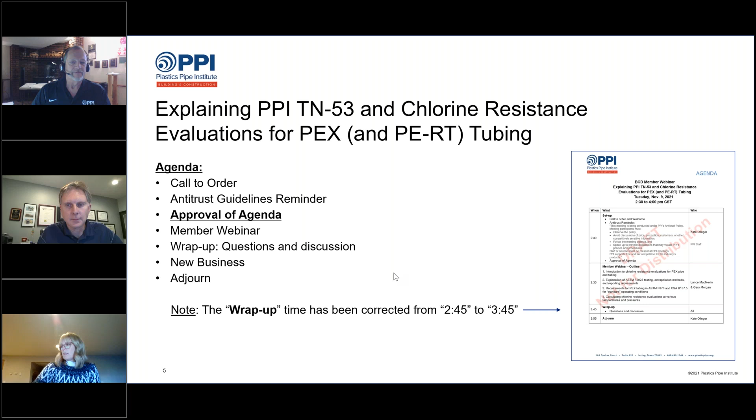So here's the outline of the presentation. We're going to start with a little section, kind of a preamble, a prologue, which is about PPI TN53 and the importance of thorough awareness of this topic. That's just a few slides to explain why we're doing this, why this webinar was felt to be important.

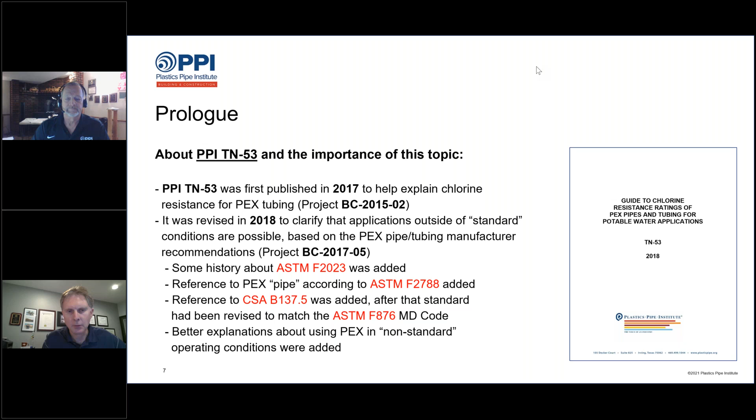So ASTM F876 is the standard for PEX tubing. If somebody within PPI is talking about pipe, we're talking about iron pipe size pipe, or DN sized metric pipe. So polypropylene could either be IPS sized or a DN sized metric sized pipe, like 160 millimeter OD. So that's why we use the terms tubing and pipe - they're not generally being used interchangeably in this presentation today.

Yeah, but the individual product standard does outline that in great detail though. But yeah, thanks for that, Lance.

Essentially, the document consists of 8 sections as outlined here. We'll actually touch on each of these 8 sections. The first being the scope, the second being the background and introduction to F 2023, and also the document does touch on ANSI, NSF, CSA Standard 61 as well. We won't really touch on that today, but the TN53 document does make mention of it for drinking water approvals.

The next section, 3, is centered on test conditions of the testing methodology, talking about different times and temperatures, with a primary focus on 140 or 60 degrees C. Number 4 is evaluation of the results of the testing, and the 5th section is the significance of the chlorine resistance ratings on the application, especially for operation outside of those ratings. Section 6 talks about the effects of excessive operating conditions for hot water piping applications, and finally section 7 covers resources for domestic potable water system design, which we won't get into today. There's also a short summary statement at the end of the document.

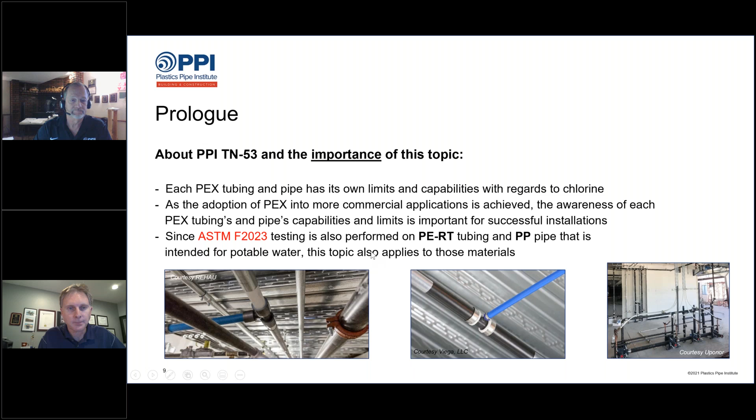Yeah, those are all commercial installations. So what's different about commercial versus residential is that in commercial there is the chance, the possibility, that we could be having higher temperatures and higher pressures than what we normally see in a residential application.

The focus of this presentation today is aimed at what we've referred to as free chlorine, and we're not going to touch so much on chloramines or chlorine dioxide today. As Lance and I talked earlier, and many of us on this call know, there's a current BCD project, BC 2020-01, investigating the effects of chlorine dioxide on BCD member piping materials. That is an active project, and Kate Olinger is heading up that project.

Also, we want to point out that there is a PPI statement A that discusses specifically chloramines in comparison with free chlorine when that's used in potable water. It's also a good document, one that should be used freely throughout your organizations. A lot of work went into that in testing at the time it was developed.

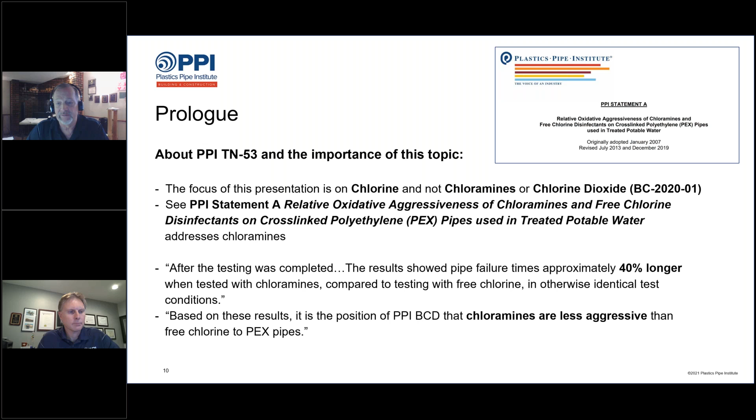Going on to that, the testing we did actually shows that chloramines testing was typically less aggressive towards the PEX pipe than free chlorine was, certainly no more aggressive. So you'll often hear us say free chlorine, but we feel that chloramines certainly don't offer any more of a challenge to the PEX tubing than free chlorine does. So as it says here, we felt chloramines are less aggressive than free chlorine to PEX pipe. Please refer to statement A if you have any questions on chloramines specifically.

Okay, now we get to the good, the bad, and the ugly. There's a reason why things are developed, and a reason that this topic received so much scrutiny in the late 90s. Many of us know this history, but there was a piping product widely used in North America starting back in the 80s, mid-80s actually, called polybutylene.

It received widespread use in residential plumbing applications for several, actually many years, until it was realized that failures were occurring as a result of oxidation induced by chlorine used in potable water distribution. It wasn't just the polybutylene tubing that had issues, it was also the polyacetal fittings widely used and molded with the polybutylene tubing that had quite a challenge with free chlorine.

As a result of that, and the result of many failures, there was a class action lawsuit. The links at the top bring you to these various settlements, but all in all, this was a major hit for the resin companies involved, and pipe manufacturers as well. Settlements totaled nearly $1 billion.

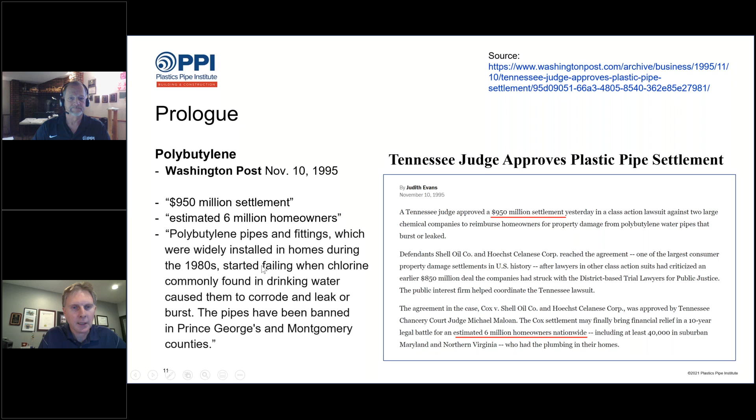That actually made it very hard for PEX to make inroads into North America, because of the bad reputation they got assigned to plastic pipes as a result of the polybutylene failures. So, of course, nobody would ever want anything like that to happen again. That's why we're much more responsible today with all the testing we do.

Yeah, and as a result, along the way - I think the original publication, before 2017, was reaffirmed in '17. Yeah, this was first published in 2004, I think. This document, TN31, was written primarily to talk about the differences between, for instance, PEX and polybutylene.

As I mentioned on the previous slide, the POM material, the polyacetal fitting, had significant challenges working with hot chlorinated water. At that time, the understanding of the mechanism of free chlorine and how it would attack polymers was not very well understood, and certainly there was no methodology in the world that actually looked at the effects free chlorine in distributed potable water has on various plastic materials.

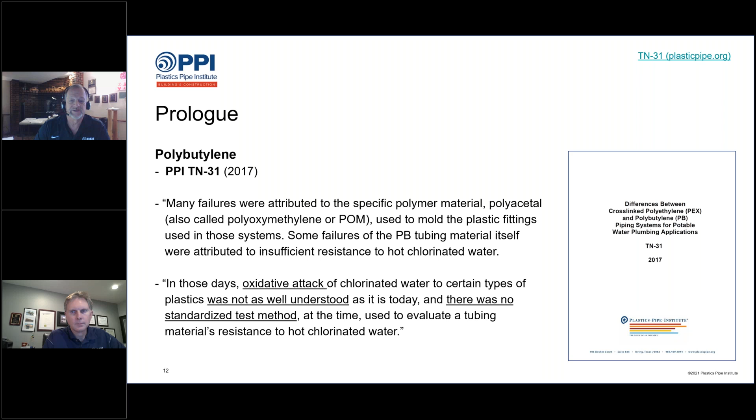So it was very important early on, before the end of the polybutylene era, to determine how we can evaluate materials for adequate stabilization, for instance, against free chlorine. So anyway, let's head to the next slide.

Okay, continued - yeah, this is just more information from TN31, additional information. The polybutylene product standard from ASTM, called D3309, doesn't even exist anymore - it was withdrawn in 2010. But in case anybody ever asks you about polybutylene, yeah, there was a standard for it, and it had no requirements for chlorine resistance.

Obviously now we have these requirements for PEX and the other materials. And you can imagine the impact this had on the code world was very significant, so immediate scrutiny would come to any piping material brought forward. I don't know that we have it in the slide here, but PEX already had inroads primarily in hydronic floor heating applications - the PEX standard was already well in existence before the end of the polybutylene era.

But immediately, manufacturers began to look at PEX as an alternate to polybutylene. But we were going to be under a much more critical eye by end users, regulatory agencies, and of course chlorine resistance being the predominant topic of the day.

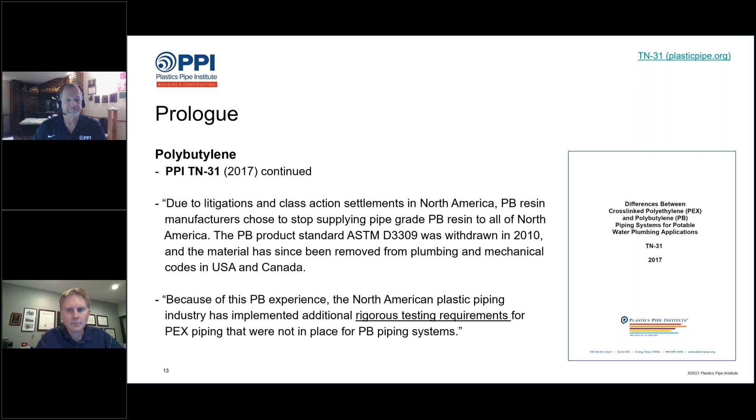Okay, let's talk about introductions to the chlorine resistance evaluations.

In this section, we'll discuss briefly the first development of the NSF protocol P171, followed by and parallel with ASTM F2023 at that time. We'll also touch on the various work done by JANA Laboratories into the various mechanisms of attack of the PEX tubing, and look at how lifetimes are determined and evaluated, and then PPI's investigation that was done in the real world, out in the field. A team of many of our folks who are still around today with us went on what I call the water scavenger hunt of PPI, to really go out and see what we could find in the field.

So let's get into that. Briefly, in the late 90s, after the PB lawsuits and settlements, as I mentioned before, the industry recognized, the resin manufacturing companies certainly recognized, the need for a chlorine test method to evaluate PEX tubings and even fittings.

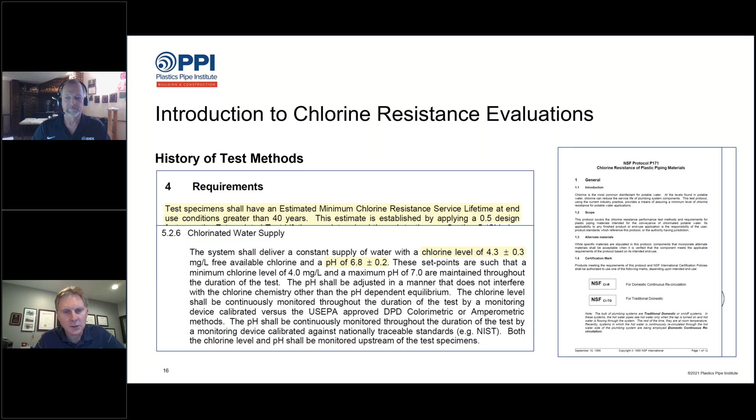Yes, very good. And further to that point, you'll probably generically hear people talking in hallways at various PPI meetings, and even in your own companies, about CLR and CLTD. Actually one of the product standards, in the case of polypropylene, utilizes this terminology, though it's not directly attached to the old NSF protocol. I think the terminology carried over from the protocol to polypropylene, where it refers to the marking as CLTD and CLR. So you'll even hear in PEX people refer to a material sometimes as a CLR material.

Okay, well let's get into F2023. As work continued in the late 90s to develop this in the early 2000s, 2001, it was finally actually published - I believe in fairly late 2000, if I recall.

This was done under, as we mentioned earlier, basically an ASTM task group that was formed. I don't know that PPI had the structure in place that we have today, but I think there was a lot of historical work at PPI even back in that era where there were task groups and discussions from what I understood. But a lot of the work did take place at ASTM meetings, which had huge attendance, and multi-hour task group meetings were scheduled to talk about the development of this. So this was before PPI got very involved in this topic.

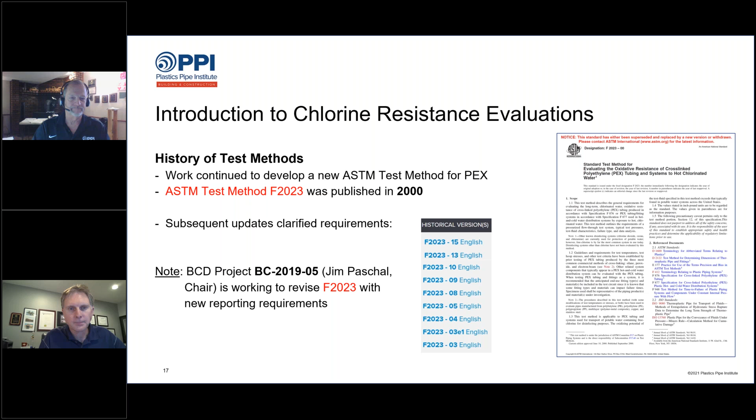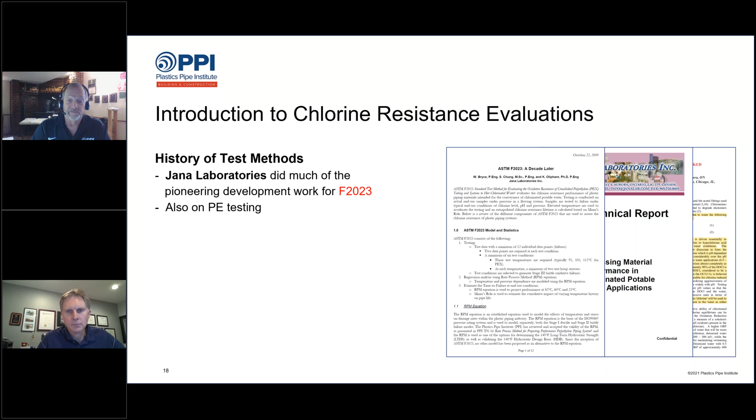Indeed. As we mentioned earlier, JANA Labs did much of literally the pioneering development work for 2023. A lot of that science, from my understanding, was based off of principles that were developed inside of Shell at the time, but they carried those principles forward, and also began taking a look at testing for high density polyethylene used for water service, for instance. Lots of documents were developed here, as Lance pans them across the screen.

All of these documents, I think most of them are publicly available, many of them on our own BCD member site location. So if you do have questions about that and would like to look into some of those documents, we do have quite an archive of those collected.

So if you haven't seen one of those units before at NSF or in the prior days of JANA, or even another firm, Element in Sweden, has similar units - that's kind of what it looks like. So, Lance, anything else to add to this page?

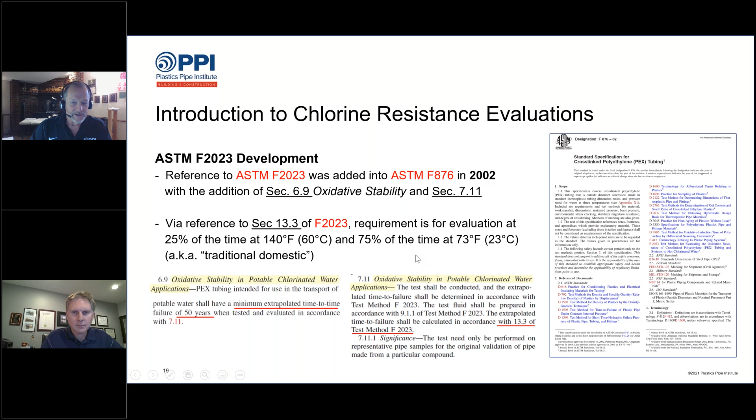Yeah, I'm just looking here. Don't think of any questions. So, on that note...

As we showed earlier, many derivations of 2023 and F876 came in 2008. This is when we finally decided we needed to do what some of the other plastic piping products have done - for instance, high density polyethylene, where we have PE at the time 3408. We developed a PEX material designation code to more clearly identify what's specific about that particular tubing, because in F876, from the hydrostatic side, as most of us know, the last 2 digits of the designation code are for the HDS.

The last 2 digits of the designation code are for the HDS at 73 degrees, and PEX actually offers 2 different HDSs at 73, being 630 and 800. So we had that differentiation to make.

Plus, at the time in 2008, we wanted to recognize chlorine resistance, which is of course what we're talking about today. It was decided to leave 0 as non-tested or non-rated. The digit 1 would be the minimum requirement for all potable water applications - 75% of the time at room temperature, 25% at elevated.

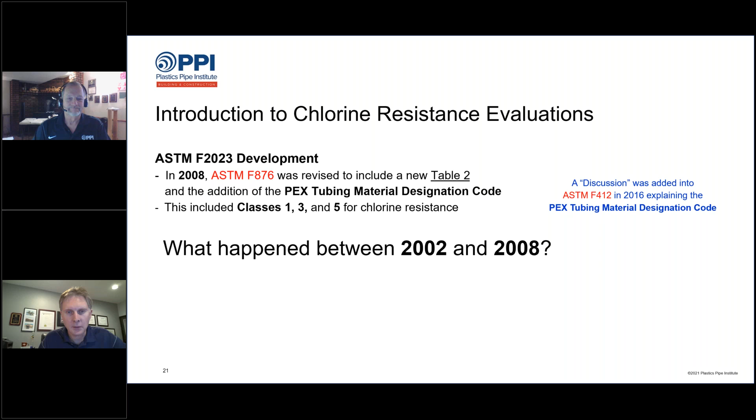And we're going to tell you what happened during that time. The truth is, before a lot of people in the industry were willing to add more strict or rigorous requirements for chlorine resistance in these higher categories, there was a lot of debate about the test conditions of F2023, and in particular, the minimum 825 millivolt ORP value.

ORP stands for oxidation reduction potential, which is a measurement of the aggressiveness of the water, and that's what's been established in F2023. But there were a lot of people saying, well, I'm not sure if we really need water so aggressive. So a lot of work was done towards actually establishing what that minimum ORP really should be.

And by the way, when you heard about UV resistance requirements being added to the PEX material designation code in 2010, well, all that UV stuff actually started as a PPI project as well. There was a PPI document, no longer published, called TN33, Standard UV Radiation Exposure Method for PEX Tubing. That set the stage for what became ASTM F2657. It wasn't written nearly as well as an ASTM test method, so 2657 is a superior document, but the seed document for 2657 was PPI TN33, and that was done during that time frame.

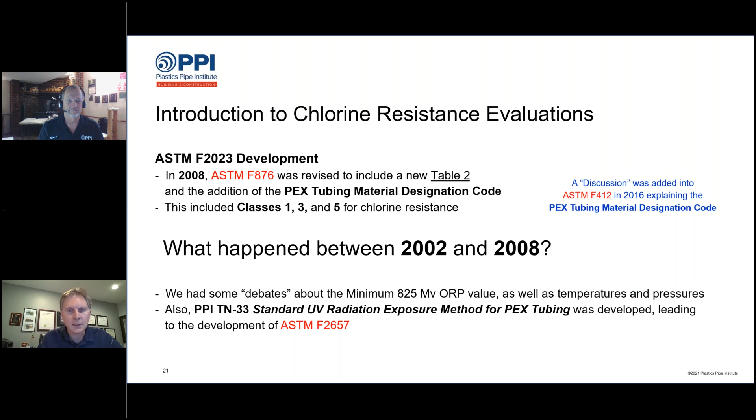But the next thing we're going to talk about is how the industry debated this 825 millivolt number, because a lot of people thought it was too high and not reflective of real water quality. They said things like, you'll never find that water in real life, so why are we testing the tubing for chlorine resistance against water that doesn't really exist in public water systems? This was one of the claims.

So back then, our division within PPI, known as the High Temperature Division, or HTD, until 2010—that's what it was known as. This is around the 2004 timeframe. We formed a chlorine task group, and most of the BCD members back then were PEX people who participated and signed up for it.

And we spent a lot of time defining, debating, discussing whether F2023's test conditions were really fair, accurate, and correct. So on this next slide, I'm going to show you some minutes from a High Temperature Division chlorine task group meeting in July 2004, a whole day meeting put together just to focus on this topic. This group then talked about organizing the work to resolve these disputes.

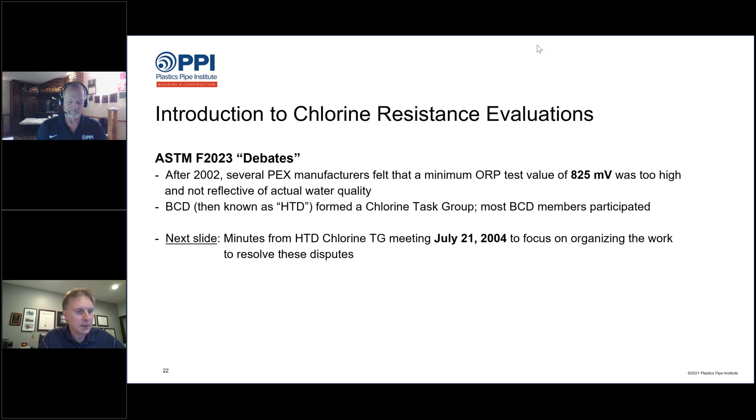And we spent all this time talking about how do we really break up F2023 to analyze it to see if it's fair and accurate. So one group said, let's focus on studying water temperature. So a group of people said, we're going to study water temperature to find out if 140 degrees is really a fair temperature to use.

One group was assigned to focus on water quality requirements, and that has to do with the pH and chlorine. One group assigned or volunteered to say, let's make a whole new test method, let's just leave F2023 behind and talk about something completely different. Well, that work never happened, but the task group was formed to talk about it.

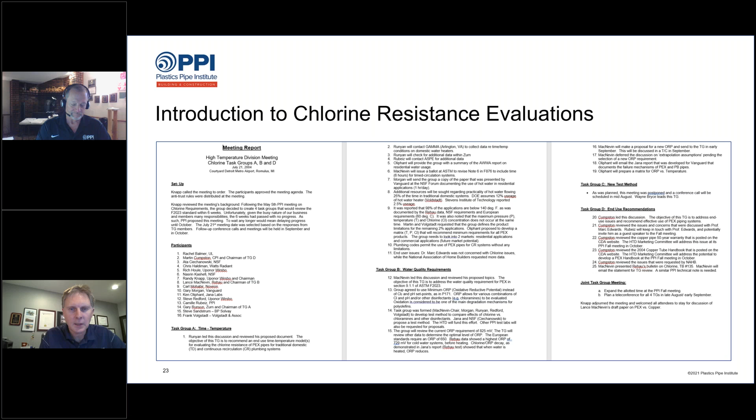And then there was also task group D talking about the end use recommendation. And they focused on some other research things, but really most of the effort was on temperature and water quality, and of those two, most of the time was on water quality.

So the next meeting of this group was in January 2005, and I forget where we met at that time. It might have been down in Kansas City or something like that. And at this point, we had agreed that we wanted to study real world water quality. That means we wanted to go to the water treatment plants that were making the most aggressive water and actually measure that water with our own instruments to see what the pH and the chlorine and the ORP really were.

So it was agreed that PPI would hire a firm called PACE Analytical that was in the business of water quality testing, and we would identify the 30 most aggressive water treatment plants, meaning the 30 areas with the most aggressive water, and we'd pay them to actually go test the water and report back.

So these are the meeting minutes from January 2005, where we agreed to that plan and how they would do the testing. And we talked about what we would do with the values that they would come back to us, in terms of would we pick the average value, the median value, all this kinds of stuff was well planned out. And if you're wondering, where did we find those areas with the 30 most aggressive water quality water treatment plants across the United States,

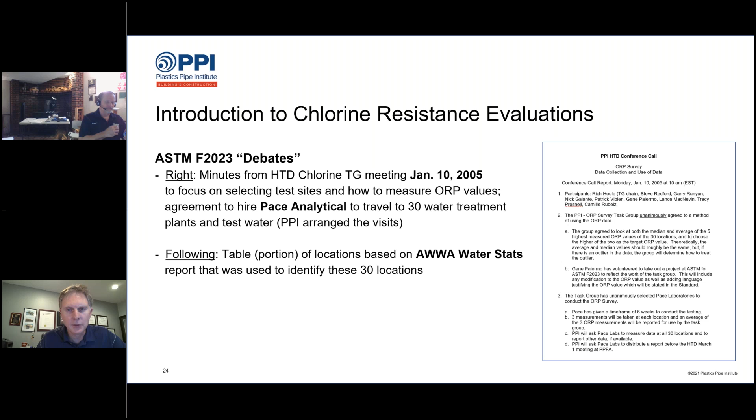there was a recent report that had been published called AWWA Water Stats. And we actually had help from Jana to take that thousands of data points from that report from AWWA and massage the data, sift through the data really to try to identify exactly what we were looking for, because we didn't care about turbidity and total dissolved solids and all this other stuff. We just cared about pH, chlorine, and what would the ORP be. So Jana helped us put together the list of what should be the most aggressive water treatment plants.

So it took them a couple of months. They reported back to us. And when the data come back, there was more debate. Some people didn't agree with the data. They didn't like the data, or they weren't sure if the data was really measured correctly,

because measuring pH and chlorine, it's pretty easy with a handheld electronic instrument. Measuring ORP, it's kind of tricky because you have to keep it moving slightly in the water, but not too fast and not too slow. It has to be just right with just the right type of instruments. So there was really some legitimate debate about whether that data from PACE Analytical was accurate or not. So not everybody was happy with it.

So to resolve that debate, then PPI organized what we call the ORP tour, and we picked the worst of the worst, the areas from the PACE trip that were the most aggressive, and a group of volunteers agreed to go and spend a week traveling through the Southeast US, which is actually where the biggest cluster of aggressive water happened to be located, and bring our own instruments, meaning people from different companies brought their own instruments, and we would go test the water ourselves.

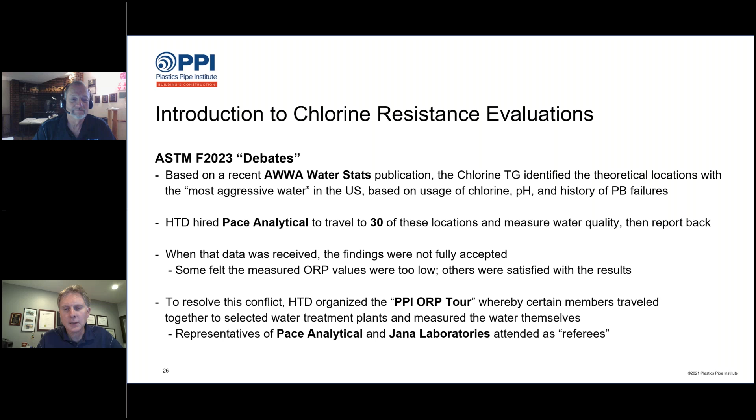And also we would bring the gentleman from PACE Analytical back with us again, and also pay to have somebody from Jana Laboratories come with us to act as a referee, to make sure everybody was using the instruments correctly, and then also to take Jana's own measurements.

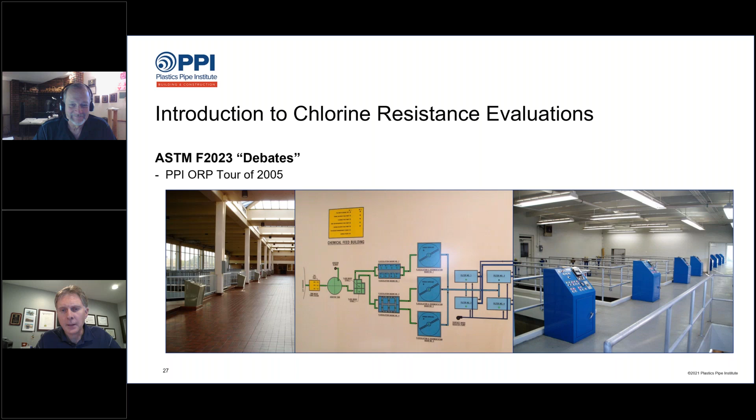Camille Rubeiz was PPI's director of engineering for our division back then, and he organized with these water treatment plants for our group of pipe geeks to tour their plants and go into their test rooms to actually test their water quality. I don't know if we'd get that kind of access today, but we went into these plants ourselves and tested the water just before it entered the distribution system, before it went to the first customer.

Here's an early morning picture, people getting ready. You can see the sun coming up. From the left, we have the gentleman from PACE unloading the van, Tracy Presnell in the first blue shirt, to his right Camille Rubeiz, and to his right Rich Houle.

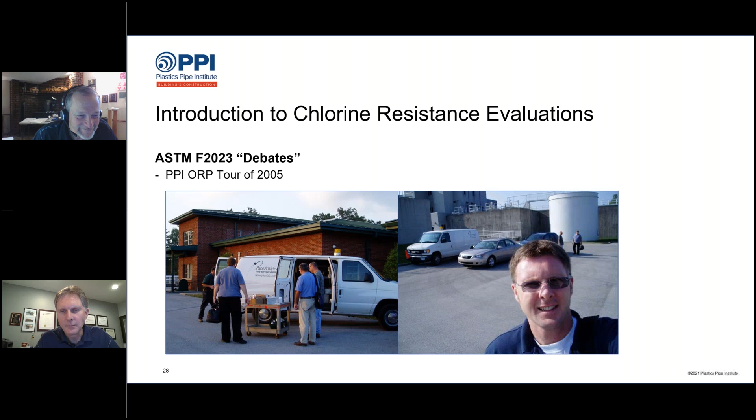I invented the selfie on this day. Long before cell phones, I thought this was pretty cool, taking my own selfie. So I was there as the photographer.

Here's our group again in one of these treatment plants. You can see the fellow with a notepad writing down all the numbers. That's Patrick Vibien, and now with PPI, so glad he's on board.

Here's one of the labs where we're actually collecting our own bottles of water to do our own measurements. And then in some cases, people would take our own meters and set them up side by side in the same bottle of water and compare what kinds of measurements we were getting, because this isn't necessarily a perfectly exact science. But all these taps here is how the water treatment plant tested their own water for pH and chlorine and the things they would test for.

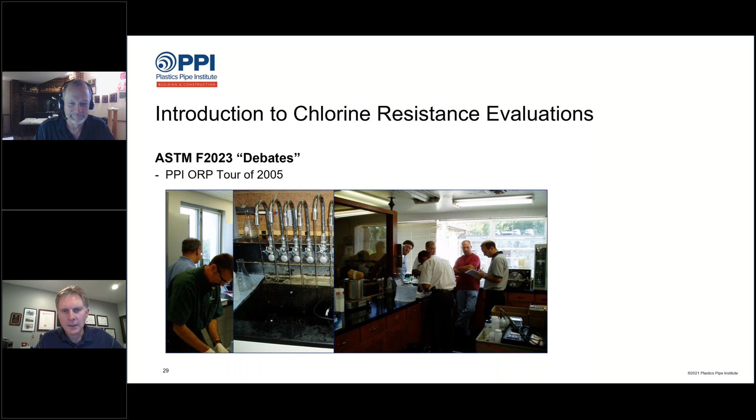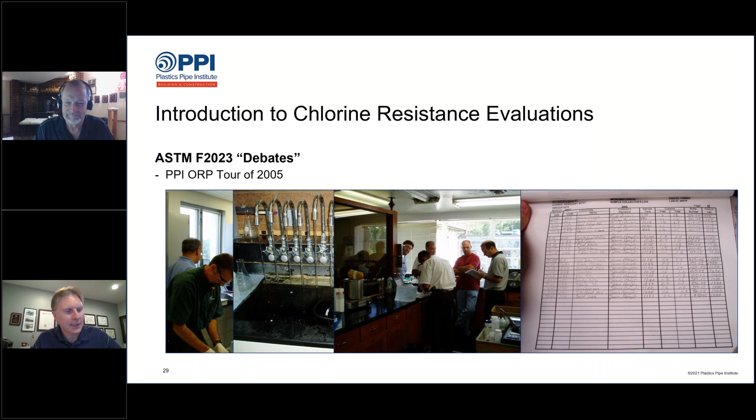Again, here's another group of us in one of the water treatment plant labs. Again, Patrick is writing notes, taking down values of what we were measuring. And then here's one of the sheets of notes for the values we were collecting. At the end of all that, we entered all our values into a spreadsheet, as you can see here.

Surprisingly to me was the pH. There's reasons to question why, and maybe that's hopefully changed since then, but it was a low pH value—relatively low for potable water. Yeah, because low pHs below 7.5 end up being aggressive to metal pipes. So most water utility plants want their pHs, I think, above 7.5, even above 7.8, to be less aggressive to iron pipes and metal valves and fire hydrants and things like that.

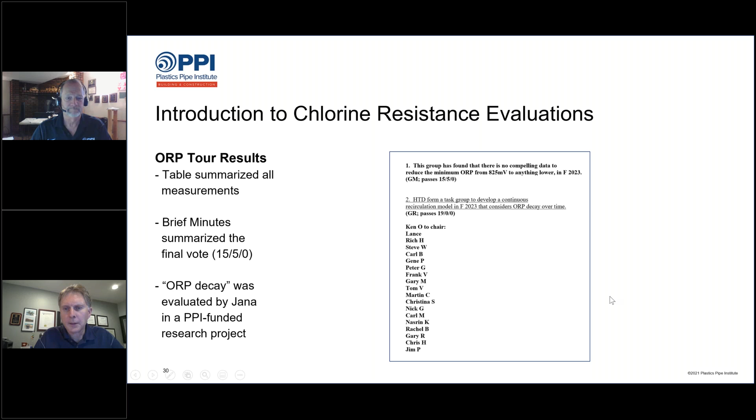So we have that data in the PPI file, but we didn't use that data to change anything in the standards. So the consensus of all this was to not reduce the minimum ORP to less than 825.

As it says here, this was followed by a very productive era within our division after that. Right after this, when we stopped fighting in the chlorine, we started work on the PEX plumbing design guide, which was published in 2006. We developed the ASTM UV test method. We did other experiments with NAHB Research Center on pressure loss through plumbing systems. And then we finally agreed to add those chlorine categories 3 and 5 to ASTM F876, and that happened in 2008.

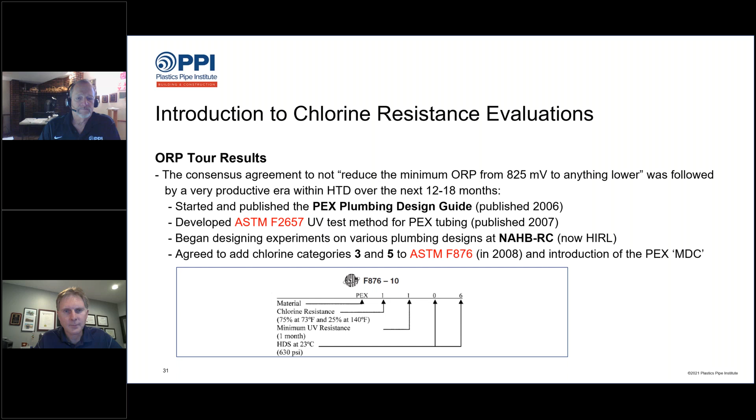So that's a lot of history. Probably spent more time on that than we should have, but hopefully people found that a little bit interesting. We included all this just so you know there really is a strong basis for the water quality settings that are in F2023 today.

Thank you, Lance, for walking through that. I know that your personal involvement with that just made it smoother coming from you, and certainly appreciate all the insights that even those of us that were involved at the time kind of forget about, that this was done, and we should feel very confident about where we stand today in that regard of the water quality.

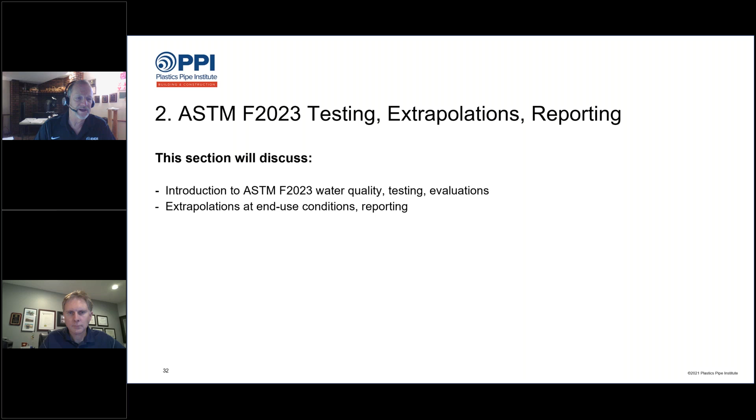Okay, let's go into section 2. We'll discuss the 2023 water quality testing evaluations and also get into the extrapolations at the end use conditions and how that's reported.

First of all, I'm just going to read the scope of 2023. This test method describes the general requirements for evaluating long-term oxidative resistance of cross-linked polyethylene PEX pipe or tubing in hot chlorinated water. The pipe or tubing used in such testing is produced in accordance with specifications such as ASTM standard specification F876 or specification 2788 or 2788M. This test method outlines the requirements of pressurized flow-through test system, typical test pressures, also test fluid characteristics, failure type, which we'll briefly visit, and finally the data analysis.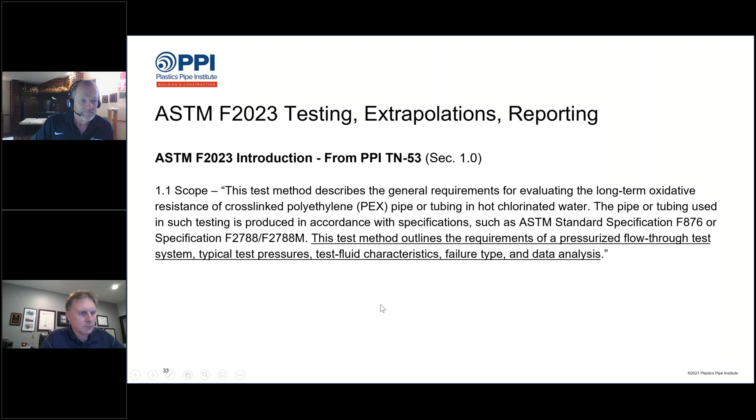This whole method, unlike hydrostatic testing, where we are purposely generating a ductile failure over time to then be able to use regression lines to calculate out what the ultimate lifetime of the pipe would be, utilizes a methodology that combines a couple characteristics of hydrostatic testing, in that we do care about the hydrostatic stress on the wall of the pipe, but principally we're looking for a specific oxidative attack of the pipe wall itself induced by hot chlorinated water.

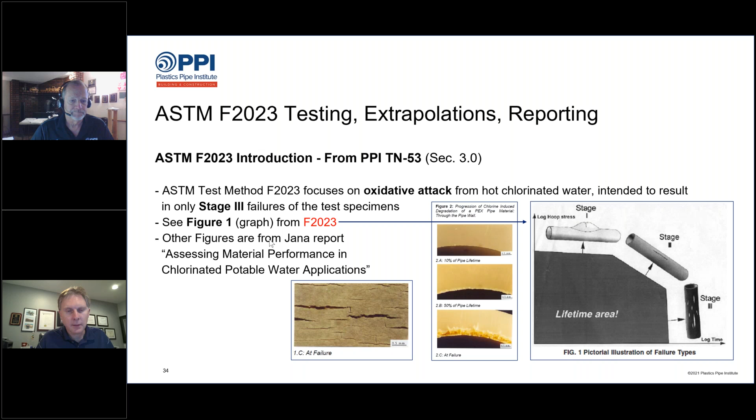This is what the actual inner surface of the pipe would look like. These figures are actually taken from a JANA report from about 15 or so years ago called Assessing Material Performance in Chlorinated Potable Water Applications. If anybody wants a copy of that, just email me and I can share it with you.

Okay, now we're talking, again, section—if you have TN53, this is section 3. This covers the fact that ORP, which we just spent a great amount of time talking about, is a combination primarily of the resultant pH with the free chlorine available. The third-party labs typically use—I think the standard requires—reverse osmosis or purified water, so we're not allowing any mineral content in the water or anything else that would perhaps influence the oxidative attack of the tubing.

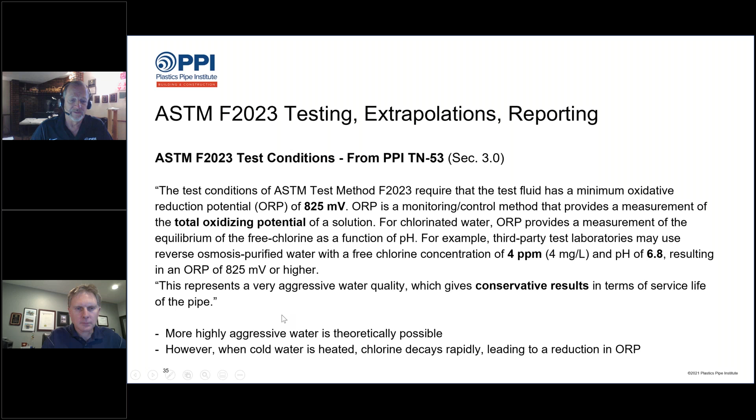And as Lance mentioned previously, when the water is heated, it is typical that you see a fairly rapid decay in the ORP just from the water heating apparatus itself.

This is a graph that is in the back of F2023. It pictorially, graphically represents the effect of pH and the free chlorine content. If you look at the right side, that'd be 10 parts per million, going down to as little as 0.1 part per million across the bottom. You can see that if you go up the ORP chart and pick 800 and come down, you can generate a relatively high ORP with a very small concentration of chlorine, but it requires that the pH is what I refer to as left of center—that 7.2 to 7.4 pH range. If you stay to the right side of that, typically you have to get into a pretty high concentration, 1.5 to 2 parts per million, to be able to generate 840 or 825 ORP.

Yeah, and Gary, kind of offline, if interesting—anyone wants... I'm sorry, go ahead, Lance.

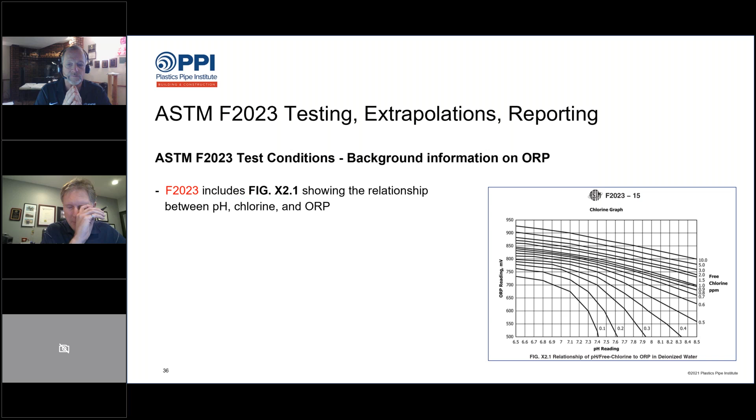Well, I was just going to say an interesting side note about this graph. It's been in F2023 pretty much since the beginning. Jim Pascal is doing a project we'll talk about later to develop a new chlorine test method for polypropylene pipes, wanted to include the same graph in it, but wanted to know the source. Did a ton of research, and turns out that graph, as far as we can tell, was first published in 1998 in a paper by Steven Bradley and Lori McPherson, presented to an ANTEC conference. Steven Bradley, he and his dad ran a laboratory down in College Station, Texas, called MPI, and they did a lot of the early work related to chlorine in water and its aggressiveness in polybutylene back in the mid 1990s. So we think that is the source of that graph, in case anybody was wondering.

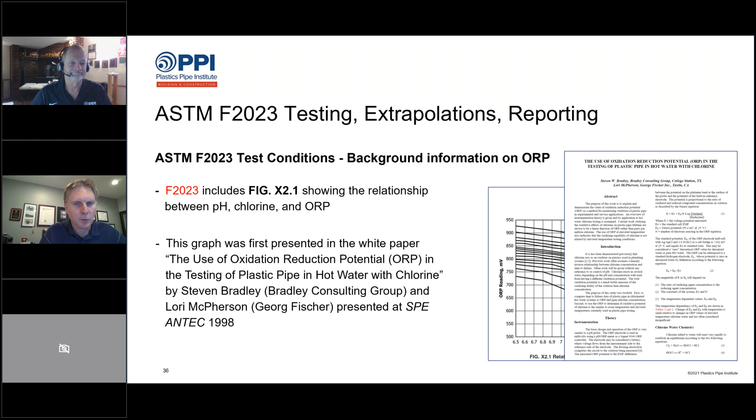I think we'll probably end up replacing through the editorial years of F2023—that graph has got to be quite low resolution, so we'll probably put a nice, clean, crisp graph back in when that happens eventually here. So this is just a reference, kind of a real-world reference in terms of chlorine, pH, and ORPs.

If you're wondering what is normal out there around the country, there is a PPI document from the municipal division called TN44, which addresses the chlorine resistance of polyethylene water mains made to AWWA C906. It also has reference points of average disinfectants for chlorine and average pH, and the resulting ORP for some major water utilities around the country. In this case, the ORPs measured were 650, 740, 750, much lower than theoretically possible.

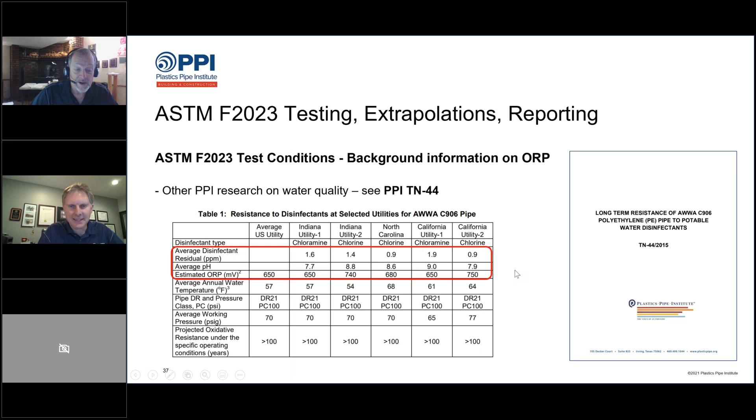Notice the corresponding pH, because the pH values are quite high. Like Kansas, I see the California Utility 1 uses chloramine, which would be very similar to our water here in Kansas City. I haven't measured ORP, but we typically reside right around 9.2 pH, which isn't fun if you have a hot tub like me and have to get the chemistry under control. It's a battle. But it's quite amazing the impact pH has on ORP. Great paper, though.

So then we get into the test conditions, and I think most of us on the call have been involved at some point with your own company's testing of PEX or PERT. Typically the test temperatures are 115, 105, and 95 degrees Celsius. There's a requirement that they be separated by 10 degrees Celsius. There is some test data done at 90, 100, and 110 as well, but principally the test temperatures are done at three temperatures.

Also, two or three stress conditions depending on the test. Typically the pressures used are 40, 60, and 80 psig, and 80 was strategically selected, from what I understand, to represent the actual maximum residential water pressure that would exist.

And as far as the calculation, how the hoop stress is calculated—when you hear about material stress, we're talking about the circumferential stress that results from internal pressure on the pipe. That calculation is shown in the bottom right here, where you can plug in the dimensions of the tubing, the DR, in the case of DR9-1, to calculate the actual relationship of internal pressure to hoop stress.

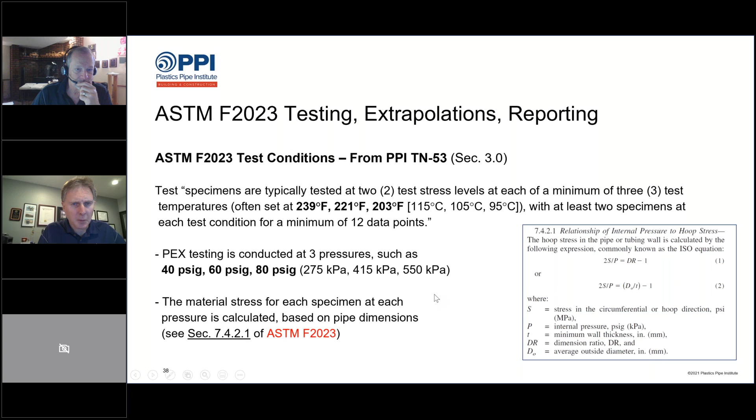Exactly. And apologies to people, we are going to be jumping back and forth a little bit between Fahrenheit and Celsius, because a lot of the standards talk about temperatures in Celsius.

We also refer to a full data set for chlorine, which is typically a minimum of 12 data points. These are actually generated until the point of failure, and entered into what we call a rate process method, or rate process model—we refer to it as the RPM equation. There is a separate paper discussing the rate process method, TN16, another good document to look at.

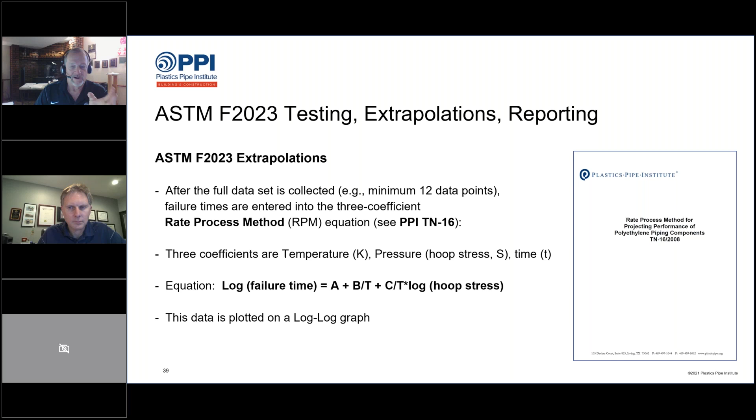The 3 coefficients are based on temperature in Kelvin, hoop stress represented by S, and time in hours. So the equation is as shown there. It's not something you simply do with a calculator—it requires a logarithmic function. As a result, the data can be plotted on a log graph, which we'll show here, which a lot of you have probably seen. This is taken from the actual JANA report titled Assessing Material Performance in Chlorinated Potable Water Applications.

What is circled in red is the actual data points for each of the 3 temperature conditions: 115, 105, and 95 degrees Celsius. You can see there were 3 failure points at 3 different hoop stresses. At 105, they generated a total of 5 points—it looks like they had 2 duplicate sets at equal hoop stress conditions. And finally the last one being 95 degrees Celsius at 2 different hoop stress conditions.

From that, using the rate process model, one can project out to the right the calculated value, down to what was circled here, 60 degrees Celsius or 140 Fahrenheit. From this, one can take the intercept of the hoop stress and bring it down to calculate the actual years-in-value. For instance, it's calculated at 80 psi internal pressure, or around 320 psi hoop stress, and that generates the extrapolation for what would be a continuous end-use condition of 140 Fahrenheit.

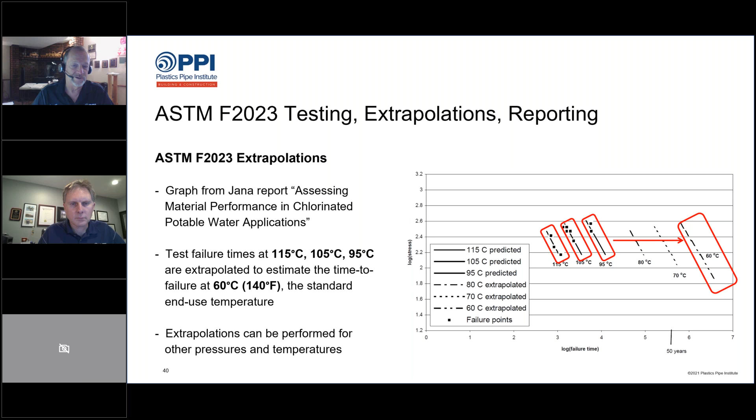This is an excerpt from PPI TN 53, section 3, which defines standard conditions. It says this test procedure is designed to extrapolate the life expectancy of a hot water plumbing pipe when used at a domestic hot water temperature of 140 degrees F and a pressure of 80 psi gauge, considered to be the normal operating limits of domestic hot water plumbing systems.

It also states that product standards F876, F2788, and B137.5 require that PEX pipe and tubing intended for use in the transport of potable water have a minimum extrapolated time to failure of 50 years when tested and evaluated in accordance with F2023. We're showing this just to remind everybody that the standard in-use operating condition is defined as 80 psi and 140 degrees.

That image on the right-hand side from section 13.2 is from the F2023 test method under the reporting section. You have to report the lifetime of the pipe for an internal pressure of 80 psi at temperatures of 180 degrees Fahrenheit, 140 degrees Fahrenheit, and 73 degrees Fahrenheit. So the standard report includes 3 different temperatures at that one pressure.

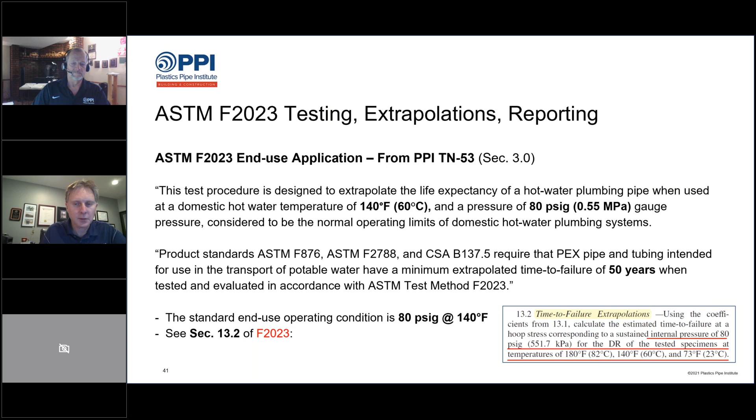Continuing from section 4 of PPI TN 53, PEX pipe and tubing for drinking water applications are required to have a minimum extrapolated time to failure of 50 years when tested in accordance with the test method. Continuous recirculation, timed recirculation, and traditional domestic conditions are evaluated by F2023 and categorized within those standards as part of the thermoplastic pipe material designation code. See ASTM F412 for a full explanation of that code.

We mentioned that before, but we're wrapping up this part of the presentation before moving on. The biggest lesson we've established over the last 15 minutes or so is that ASTM F2023, the test method, includes reporting requirements, but all the actual product requirements, the pass-fail, the minimum 50 years, are found within F876, F2788, and CSA B137.5 for PEX.

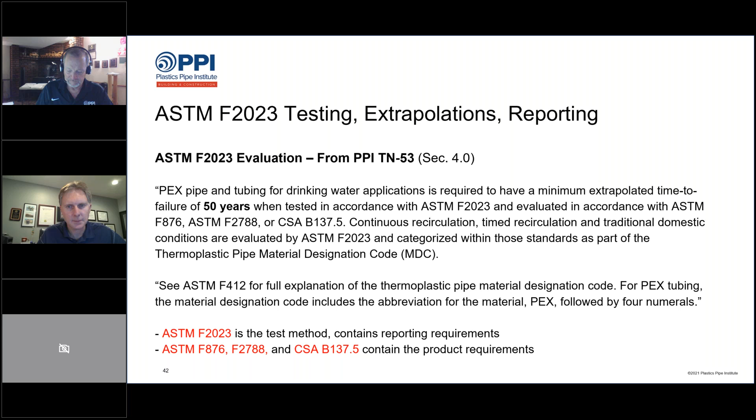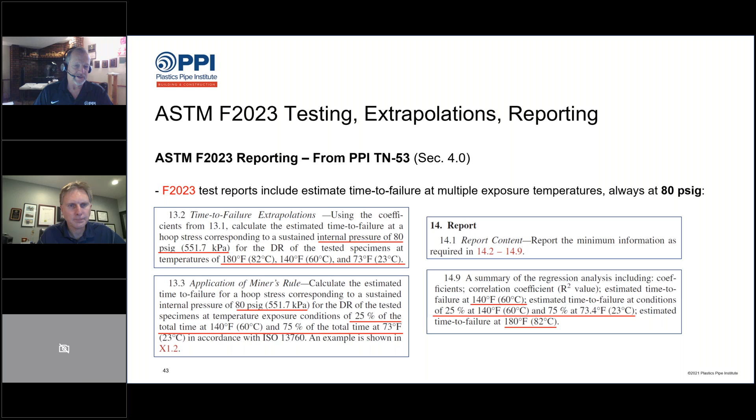Here's just a few screenshots from F2023 about reporting and about the different kinds of extrapolations that get reported. In the sake of time, we might want to jump ahead here a little quicker. Part of the topic today is we wanted to talk about other temperatures and other conditions and how this methodology can be applied. This slide shows what's being covered today.

Sorry, you skipped forward on me. I was just so—

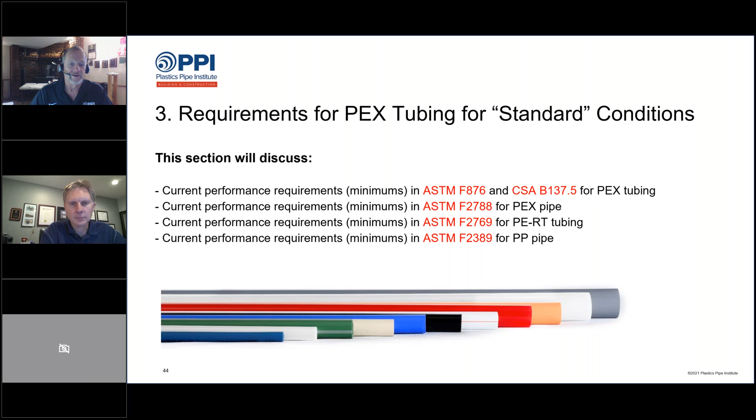The pass-fail requirements are, as Len said, in the product standards themselves. So that's where you need to actually look for what the pass-fail requirements are for the various ratings and so forth.

So let's get into the next slides. We've got some slides with the details of exactly what all these different requirements are for PEX tubing. There are 4 standard categories, and again this is a little bit repetitive—we've seen this before, what the 1, 3, and 5 mean, so I think we can skip that.

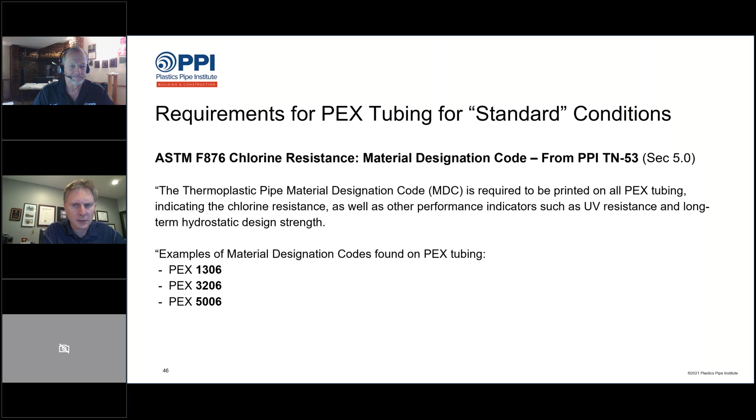There is a section of TN 53 that refers to those categories and how you could get a variety of material designation codes that tell you your chlorine and UV resistance, like a 1306 or a 3206. In F876, section 6.9 defines the minimum requirements: 50 years with a minimum first digit of 1 or higher, but still that's a minimum of 50 years at category 1, class 1.

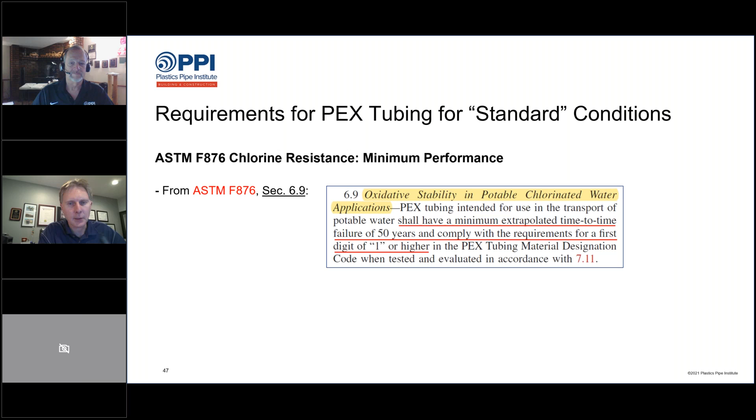Within CSA B137.5, a few years ago we did a PPI-led project to revise B137.5, the Canadian standard for PEX tubing, and basically harmonize it with F876. Now the requirements for chlorine resistance are identical, and B137.5 even includes the material designation code table, copied with permission from ASTM's F876, and clause 5.10 also spells out a minimum of 50 years.

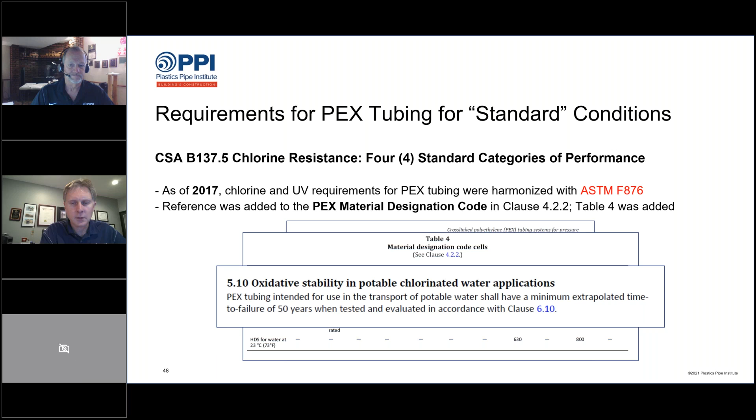F2788 for PEX pipe has the exact same requirements as F876 for PEX tubing.

F2769 for PERT tubing has 3 categories of performance. There is no 0 because F2769 is only for potable water, so there's no 0 chlorine resistance since you can't have that for potable water tubing. It's important to note too that PERT today doesn't have a designation code yet.

But they did mirror, if you will, class 1, class 3, class 5, and we can more or less say that equates to the same meaning and the same values for PERT. So you'll hear some referred to as PERT class 5, with the marking literally being a CL5 on that product.

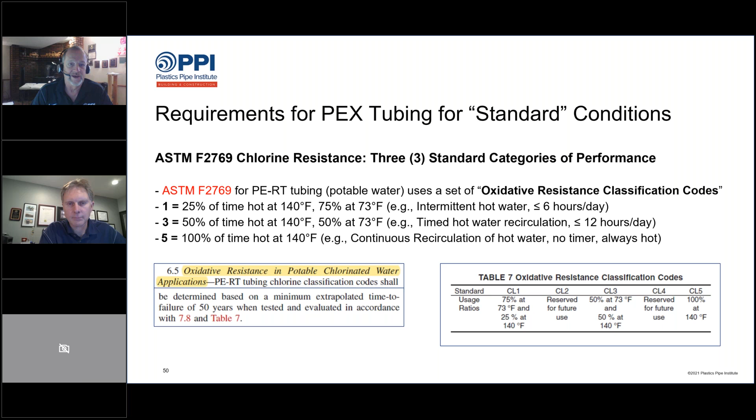And then finally for F2389, the polypropylene pipe, it is a requirement in that standard that any pipe intended for potable water shall be labeled as either CLTD or CLR. CLTD is like a class 1 for PEX, CLR is like a class 5 for PEX. Those are the requirements within ASTM F2389 for polypropylene.

So it is mandatory. By the way, we have a PPI project led by Jim Paschal to develop a new ASTM test method to evaluate the oxidative resistance of polypropylene to hot chlorinated water. It's a lot like F2023, but it'll be its own test method when it hopefully soon gets approved. There were 2 negatives on the last ballot, which just closed a couple weeks ago, so we're hoping to resolve those and get it published.

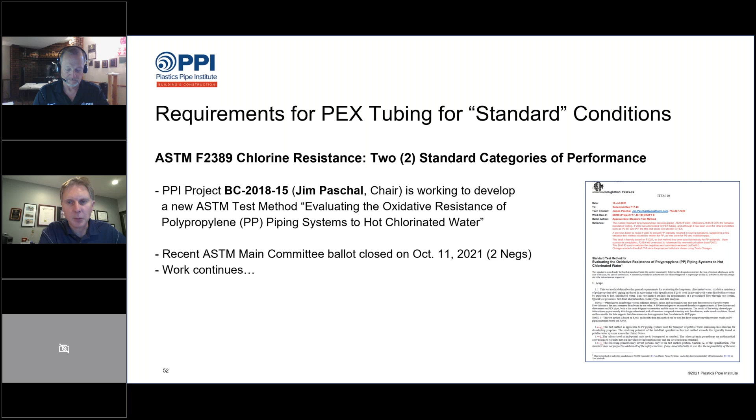Then we get to move on to point 4, which I think is the most interesting part for most people, where we can actually evaluate the estimated time to failure for other operating conditions, which are above and beyond or below the specified standard end-use conditions for temperature and pressure.

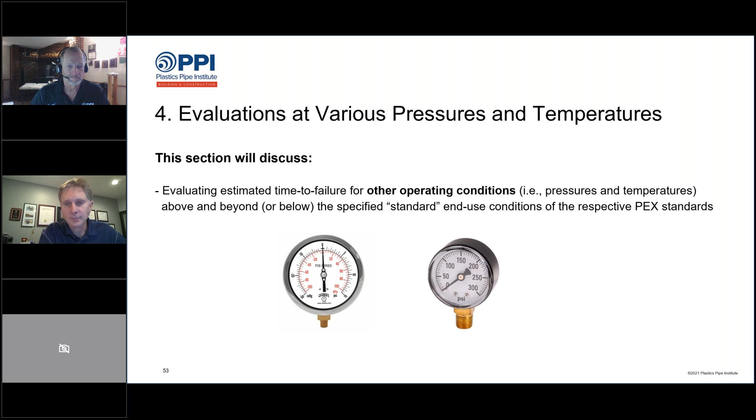And the way we're going to do this—by the way, it does say in TN 53 section 4 that you can do this, that you can do your extrapolated time to failure at other operating conditions, so that's in our document—is to use the same data set that we looked at earlier from that old Jana report and do extrapolations there.

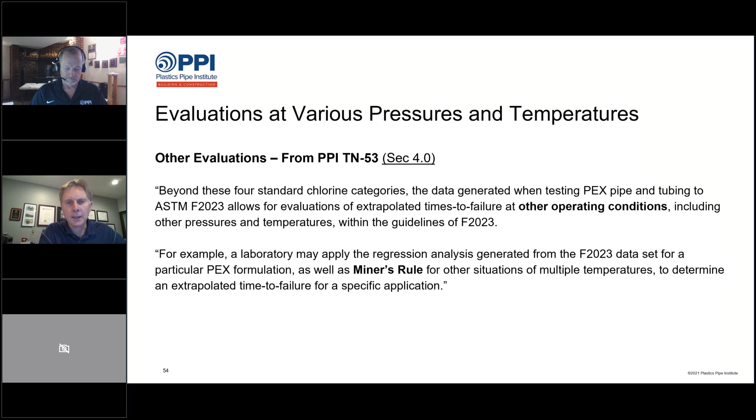But before we do, we probably should do a quick explanation of Miner's rule. Do you think that's important, Gary? Yes, I do, because that is the premise for how we can do a mix of high and low temperature. There is no other way right now.

So when somebody says a pipe that's traditional domestic, meaning 25% of its time, 6 hours a day, it's exposed to hot water, but the rest of the time it's exposed to 73°F water, just regular room temperature—they get those extrapolations from the same data set, but apply this thing called Miner's rule, where they evaluate what is the lifetime for being hot all the time, what is the lifetime for being cold all the time, and then apply the hours per day to each of those conditions through this equation to come up with a projected time to failure.

And you can actually do that kind of equation for any mixture of different temperatures and different stresses. We don't have a PPI document that describes Miner's rule—it's been around for a long time. This is just something from a website that talks about Miner's rule, first developed in 1945, and provides the equation, which can be used for temperatures or stresses or other parts of the operating exposure.

I think it's important for manufacturers that get tough questions for maybe some commercial applications—they know very clearly that, say, they're going to be operating at a higher than 140 temperature, but it might be only for 40% of the day, 25% of the day. But using Miner's equation and the original data set, you can calculate out what the expected lifetime would be at those conditions outside of what's evaluated in the final test report of F2023.

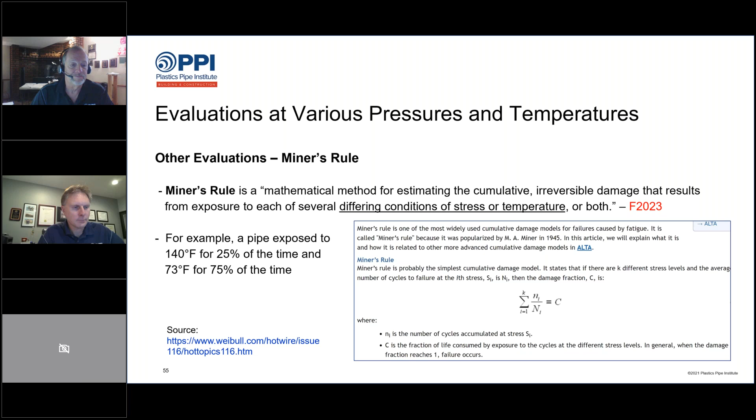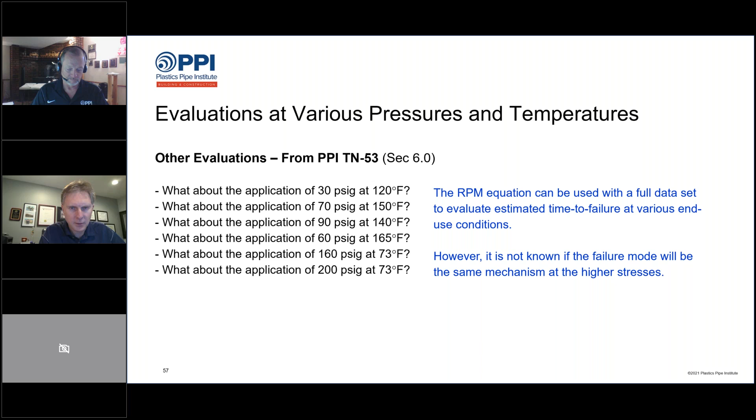And then we're going to look at a couple of 73°F conditions, 160 psi, which is like a water service pipe, and then 200 psi, which could also be a water service pipe, but both at 73 degrees. So we're going to use this RPM equation to analyze the failure points from this particular PEX formulation to come up with the extrapolations at those various conditions.

Just as a reminder, this is the data set of PEX tubing that we're evaluating that was published in this Jana report from 15 years ago. So we're not doing this for many of our members' current PEX products. This was all publicly available information.

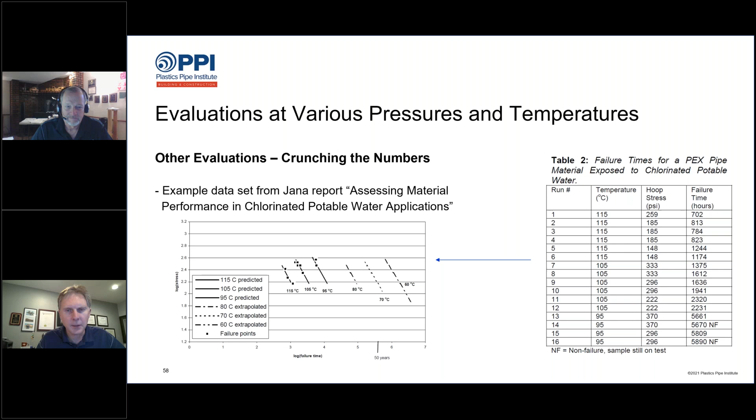And the way we're doing it, because this is not something that you do like in the back of an envelope, like Gary said, fortunately, with Patrick Vibien as a colleague, he was able to entertain me by developing and providing me with an Excel spreadsheet that actually has the rate process model equation built in, and we can enter the failure times for our full data set at their various temperatures and pressures, and through this Excel sheet, then enter in any end use temperature or pressure and come up with the predicted test lifetime.

So what I'm going to be showing you are calculations coming from this spreadsheet. It's not an official PPI publication. I can't give it to you, but that's how we're going to predict these numbers.

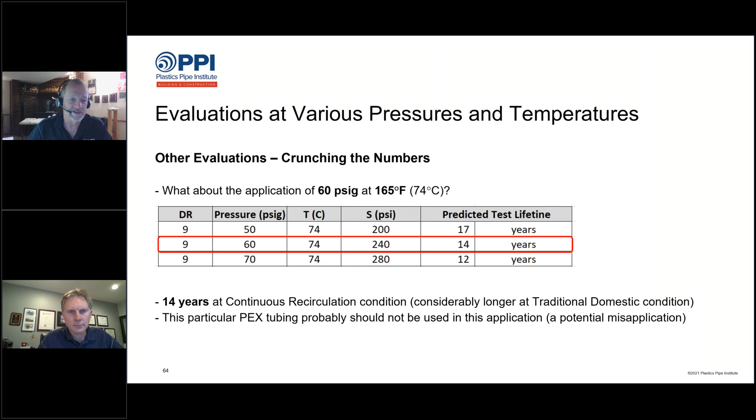But at the same time, there might be some commercial applications where you're just looking for a certain part of the day at extremely elevated temperature, and one needs to use the miner's rule to make sure that the lifetime is what they would expect for that particular plumbing construction for that application.

And it is a note that was brought to us by Patrick, Patrick Vibien, that this hasn't been studied out greatly when we are talking about considerably higher stresses. So while certainly the expectation is 50 or 100 years, these years might be much over-projected. And this methodology really probably doesn't accurately extrapolate at the very low temperature what the real lifetime would be of the pipe based on only cold chlorinated water.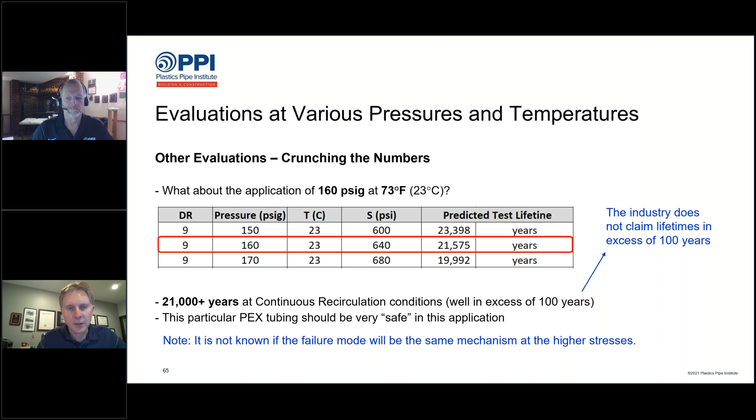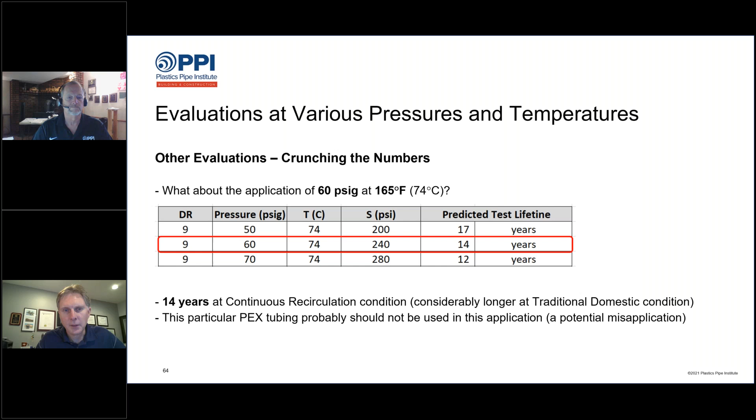So if someone does contact you and say, what is the chlorine lifetime of my pipe at 60 psi and 165 degrees F? If you have your full chlorine data set, and you probably do if you're the pipe manufacturer, you could do the three coefficient equation yourself to do that calculation, or you could ask your certifier, whoever did the testing and the certification, if they have the Pipesen software or other software, they can probably do that calculation for you on a case-by-case basis. I'm not saying that they have to. There's no obligation for them to do it, but whoever has that data set should be able to crunch the numbers like we were doing and come up with that projection for you at various non-standard operating conditions.

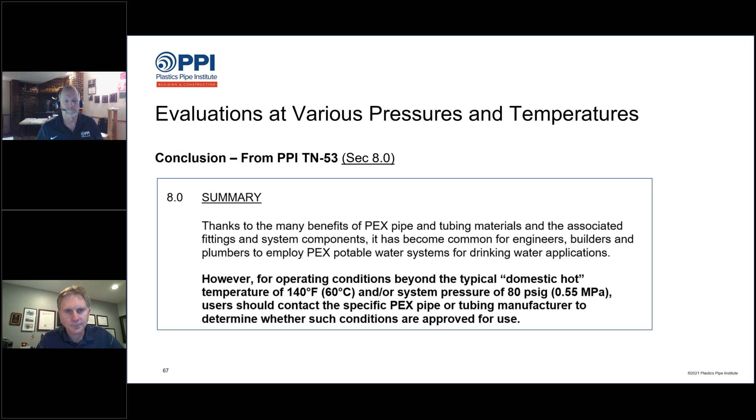So let's wrap this up. We're calling this our summary and our takeaway. Hopefully everybody got this information and it makes sense. Number one, the actual end use exposure plays a big role in the estimated time to failure for each PEX material. Chloramines are less aggressive than free chlorine — remember that from the beginning — and that makes the time to failure go up. But chlorine dioxide, based on the data that we've collected so far through the project shown here, that's more aggressive than free chlorine, and that'll probably make your estimated time to failure go down.

To the next point, lower chlorination or a higher pH and a lower ORP value reduce the aggressiveness of the water, and therefore that should extend your pipe lifetimes, meaning the F2023 projection is probably conservative, maybe too conservative. But PPI has not published any evaluation of other water conditions, so there's no established value on what happens if my ORP is just 750 millivolts. So each manufacturer would have to make that evaluation on their own. But for sure, if the system is using higher temperatures and or pressures, that would definitely increase the rate of oxidative decay, and that naturally reduces the pipe lifetimes. So green arrow going up, pipe lifetime should be extended. Red arrow going down, pipe lifetimes should be reduced.

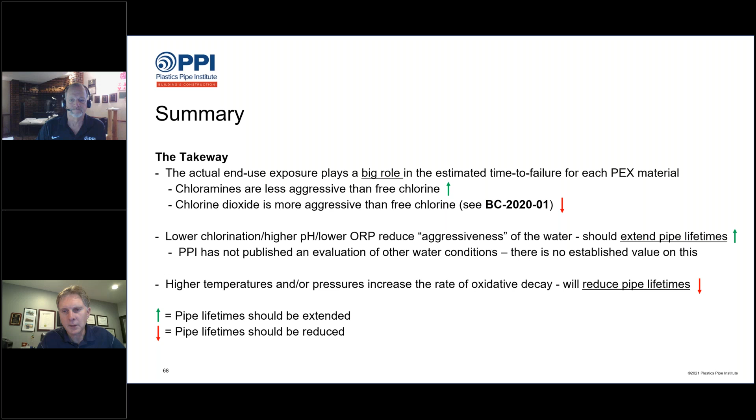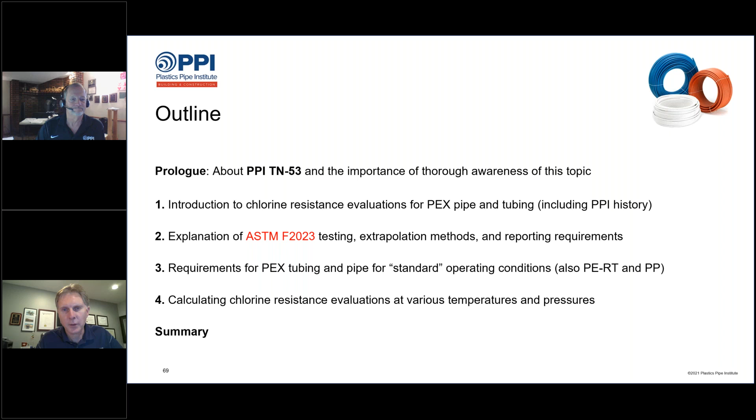So that's kind of the simple recount of everything we've gone through. Here was the outline that we went through. We did definitely touch on all these points. We probably ran a little long and spent too much time on some of these points, so I'll apologize for that — we've never run the seminar before. But at this point, we still do have a lot of people on, and 51 people connected.

At this point, I think we want to open it up to any questions or discussion. Lance, there's a chat from Jonathan Simon that he put up about the EPA guidelines. I don't know if you saw it. Okay, yeah, I didn't page down.

Thank you, Joe. Since 2005, the EPA guidelines for water treatment have evolved and water district service areas have gotten much larger. Has this study been repeated since 2005 to validate the 825 millivolt, and is this number still accurate? Well, it hasn't been redone by us, but AWWA does continue to publish their water stats reports every so often, not on a super regular basis. And PPI has been paying attention to those values, not just for this topic, but also to see who is switching to possibly free chlorine. And there's not much of that out there. So I think for the data that we've seen coming out of the EPA or AWWA, there's no reason to believe that any of our values here should change. Certainly, it's not getting any more aggressive, not based on anything that I've seen.

Jonathan, are you still on? I'm not sure if that answers your question. I'm on, and it does. Thank you. All right, thank you for the question.

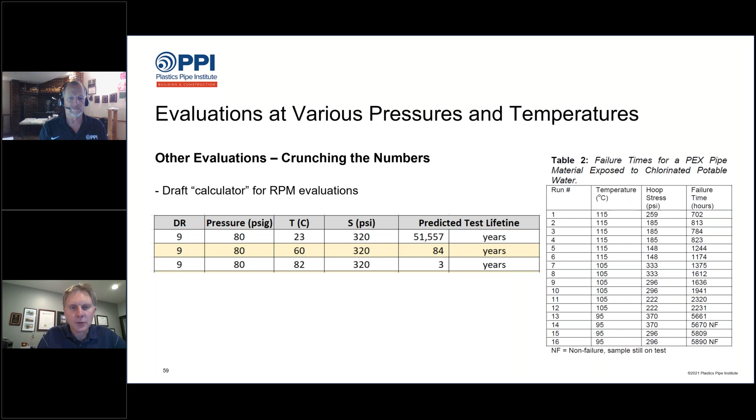That's when you do a lot of these extrapolations with pipes. It's not a requirement in the standards to look at a 95% lower confidence level, but all the extrapolations we did are just based on average failure times. If you were testing your pipes, even at 60 PSI, 105 degrees Celsius failure time, if you had 3 samples and there was a really wide range in the failure times of those 3 samples, that would indicate you probably should be a little more conservative in your extrapolations, because some of your pipes overperform, some underperform, and some are the average.

So if in your own test data you see a lot of scatter, you probably should apply your own conservative factor, and the formal way to do that would be to do a 95% lower confidence level adjustment to your extrapolated times to failure. The little Excel file I have here doesn't do that - that was all based on average failure times.

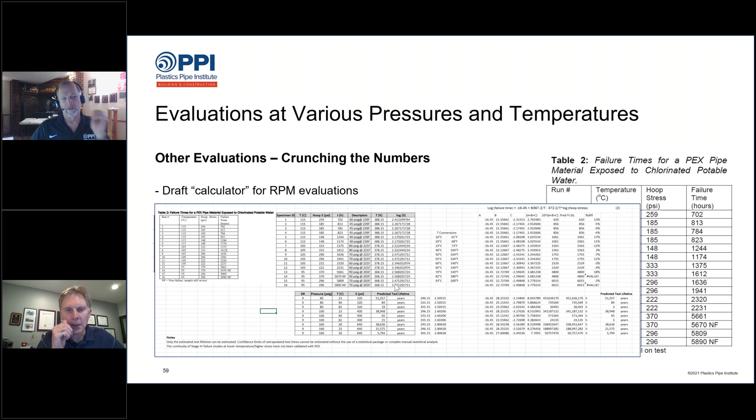And those of you that do have access to Pipes software, that has a lot of features built into it, so you can do the calculations just by plugging in the failure times.

Okay, anything else, or even after the fact, if there's something that's spurred - well, maybe we ought to take a look at this or that aspect of F2023. I know we've just completed a review of F2023, but I do think we always should be looking for ways to simplify and solidify the methodology itself. So please don't hesitate to bring questions, and certainly if you think it justifies a project, we can take that up amongst the management committee.

I know a few of you know, but I'm currently the R&D chair for our division for the research and development projects, and we've got a lot of irons in the fire right now. Some of those are on hold, but we're working on a lot of them. As always, if you think there's a need, at least let us know about it.

One other thing I'll add, just from the chat standpoint, we had Jonathan's question, but Kevin also shared some pH values and other parameters in parts of British Columbia that were extremely low. So I think the water quality around the United States and Canada continues to be of question, especially when we talk about controlling or monitoring some of these parameters - it's definitely a challenge for those water treatment facilities.

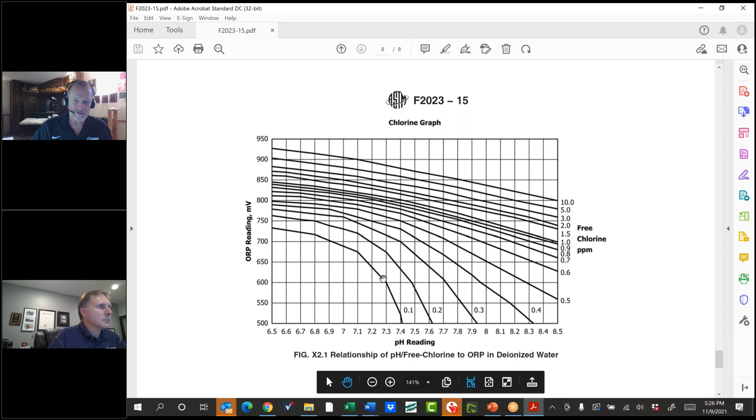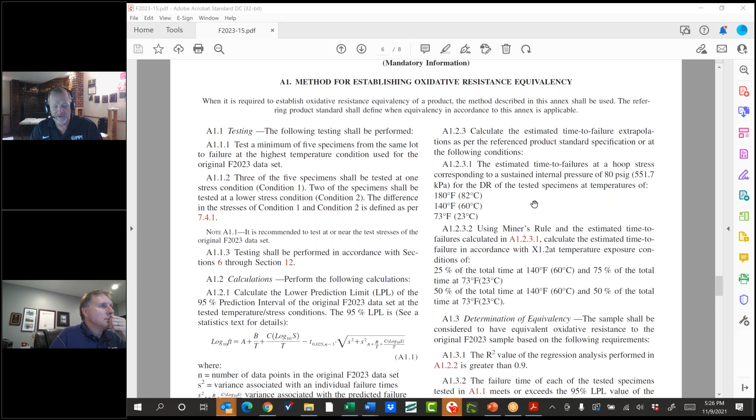They do, and they actually - 115 degrees C and 60 and 40, PSI typically. Yeah, typically that's the case, but does it actually limit? Lance is pulling it up here right now. We can take a look at it, but if there's those that have to run, I want to thank you for your participation today. We'll continue on with this discussion, but certainly we've had a great turnout today. We had as many as 76 at one point, mostly 75 to 72. So it's a fantastic turnout today. But yeah, let's take a look at this and see.

I'm curious about the background of where Annex A1 came from, because it's kind of an important part of this whole discussion about equivalencies as well, since Annex A1 is also used for the UV equivalency. You do that as an option, right? Yeah, five unexposed specimens compared with five exposed specimens. Or you can have five exposed specimens compared to the original data set, and those kinds of things.

So yeah, Robert, I would make a note in A1.1.1 - I don't know exactly the year it was changed, but not long ago, in NSF ANSI Standard 14, it no longer says the highest temperature must be used for testing. The reason people pick the highest temperature is it's fastest. But you are right in what you said.

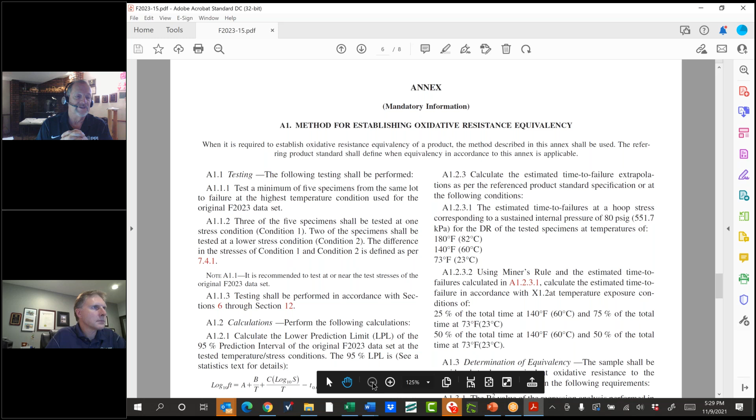It does remind me that at some point we really should review the annex and consider, if you will, almost backwards harmonizing it, because there really shouldn't be anything that precludes a manufacturer from doing this verification or validation at one of the three temperatures used. Obviously if you want to do it for many thousands of hours you can do it at the lowest temperature, but certainly the intermediate temperature - and I know we've talked about that a lot in the development of the polypropylene standard.

At 115C, and even for PEX, the 115C testing, while it is quicker, might naturally have a little bit more scatter, given that the activation temperature is so much affected at 115C, or the activation energy seemingly so impacted at 115C, and may not be a true representation of the polymer. So anyway, we'll take a look at that.

I think down the road that's a great point - maybe didn't mean to bring that up, but honestly, sometimes I tend to think we avoid looking at the annexes or appendices when we're revising a standard, but perhaps we'll take this up separately.

Well, the thing is that this Annex A1 is actually what we have day-to-day exposure to, or more or less year-to-year exposure to. A company might develop one 12-point data set every decade or two, and then after that just leave it, because it's an expensive, time-consuming process. But DLT tests are done more frequently, depending on the colors involved. So it's like, you do a DLT, it's a new color, and then you want to establish UV, then you do another DLT, and so on, and it adds up.